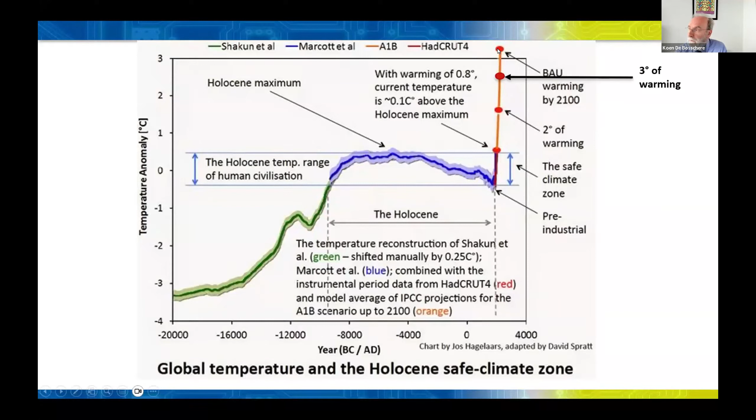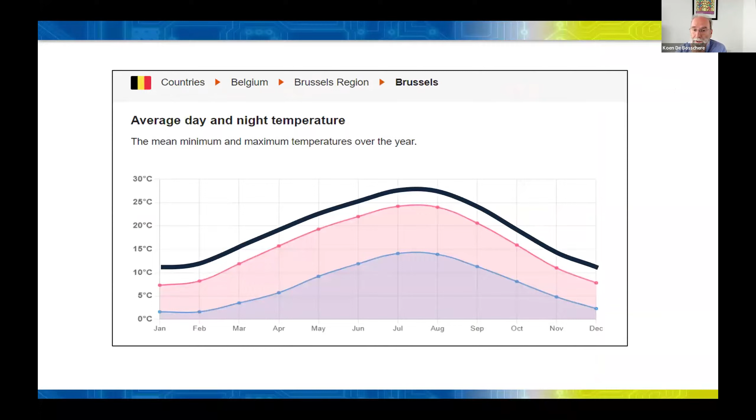If we do nothing, business as usual, we will end up with almost 4 degrees Celsius increase. What does it mean? If you are in Brussels, this is the current temperature. If we add 3 degrees, we end up with the temperature of Barcelona. And if you are in Barcelona and we add 3 degrees, we end up with the temperature of Agadir in Morocco. But this is the desert, which means that in the Mediterranean, maybe we'll get desertification if the temperature goes up by 3 degrees Celsius.

How is this possible? Well, the reason is, of course, that carbon emissions keep increasing. We have been trying to reduce them over the last 20 years, but it leveled out a little bit, though we are still not decreasing. Here you see all the carbon emissions due to the use of fossil fuels. On top of this is methane, on top of this is nitrous oxide, then we have fluorinated gases, and deforestation, which is also causing emissions. So far we have not been able to turn the trend down.

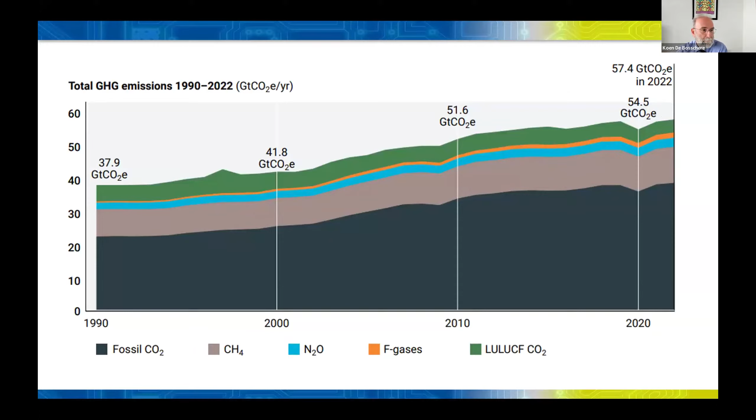So what about ICT? Here I'm using the energy consumption, the electricity consumption, as a proxy for the emissions, which at this moment is correct, I think. Here you see a report by Schneider Electric from 2021 that projected that by 2030 there will be a dramatic increase in power consumption by the ICT sector. A part will be due to computing storage. The blue one is the mobile networks, and the brown one is IoT device use — these are the main factors that will increase the power consumption.

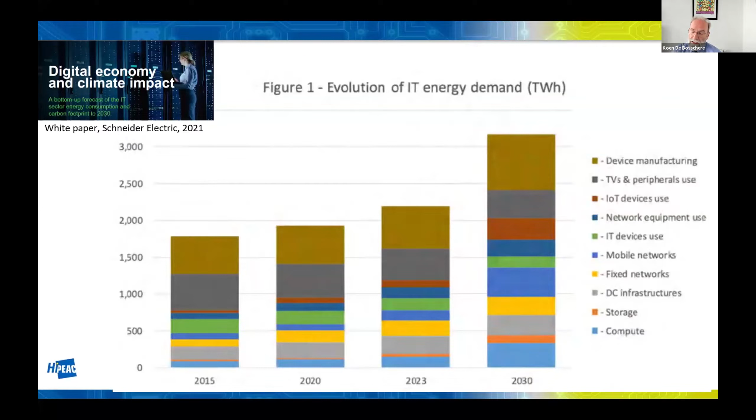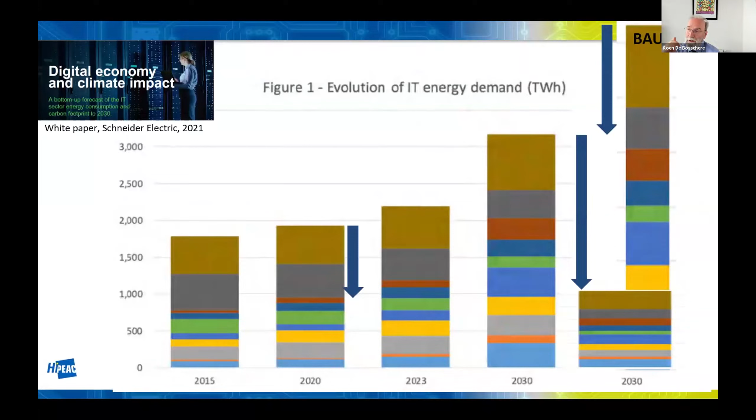If we had done nothing in the last few years to reduce the power consumption, business as usual, it would have been higher. So we did a very good job in trying to reduce the power consumption. But climate scientists expect us to reduce the emissions from 2020 by a factor of 50% by 2030, which means we have to do more. And that's a little bit of a problem, because many of the things we are doing are not reducing the power consumption, but are increasing the power consumption.

For instance, people say, well, maybe the fact that we consume more power isn't necessarily a problem, because there is something called enablement: our technology will allow other sectors to reduce their emissions.

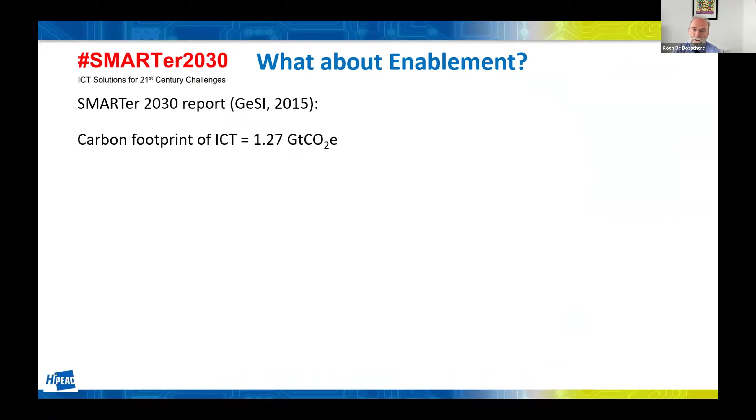And there is even a report on this, called the Smarter2030 report, but that dates from 2015, so that's almost 10 years old. There they did the calculation and say the ICT is emitting 1.27 gigatons CO2 equivalents, but it could save 10 times more in other major industries: agriculture, transportation, heating of houses, and so on. So that's about 20%.

Now, 20% is not enough, because we have to reduce more, like 50%, but 20% is still substantial. Their conclusion was that ICT is actually carbon negative, because for every ton of CO2 we emit, other people will allow to reduce their emissions by tenfold. Of course this is not true, because they claim that reduction already in agriculture, for instance, so we cannot claim it a second time, otherwise you claim it twice.

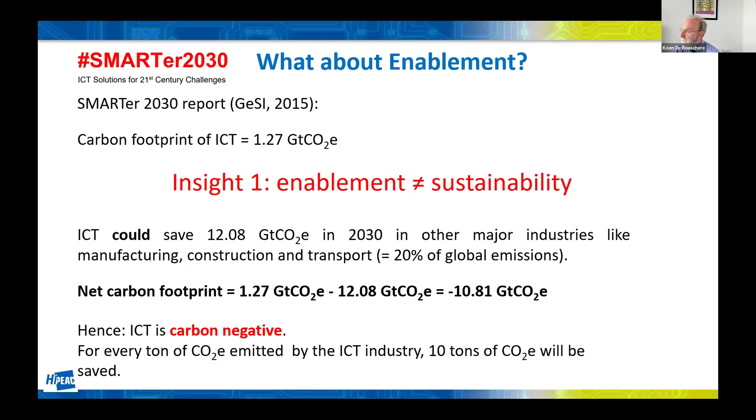So the conclusion here is that enablement, as they call it, is not the same as sustainability. There is an effect, of course, but it's not that you can just say we don't have to save energy, or we do not have to save emissions because somebody else is going to do it for us.

Google, for instance, used 20% more water in 2022 than 2021. So that's not just an increase of 1 or 2%, but an increase by 20%. Microsoft, similarly, 34% in just 1 year. And so the hyperscalers, they think, okay, they want to be sustainable too.

So this is a really difficult problem. But this is not the only issue. Another issue is that the power consumption of the devices that we are using are not the only source of emissions.

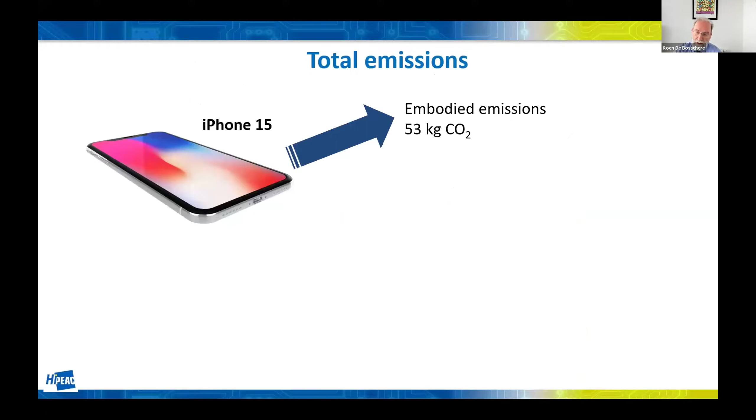Here you see a phone that weighs something like 300 grams, and it has emitted 53 kilograms of CO2 just to produce it. Apple has done a study for the iPhone 15, and this is the embodied emissions, so the emissions caused by the production of the device and the transportation. The operational emissions are more like 10 kilograms of CO2, which means that the operational emissions we are focusing on so far are only a part, maybe a major part, but only a part of the total emissions of the devices, the smartphone, but also the data centers and so on.

So here there's a second insight, that power efficiency is really part of the story, and it's definitely not equal to sustainability. It's not because you use less power or only green, renewable energy, that you are 100% sustainable.

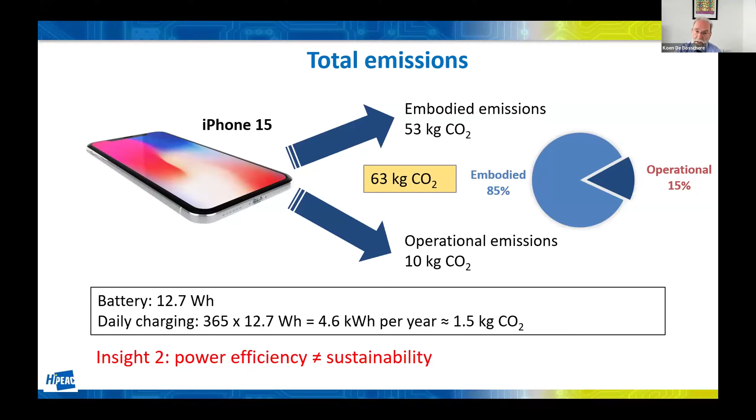So this is an introduction, and I'm very glad that we have 3 experts here in our webinar. The first presentation will be by Patrick, on what it means to be sustainable. Then there will be a second presentation looking more at the material side and what happens in the fabs. And finally there is also a presentation by Lieven Eeckhout on what we can do as computer architects to reduce the impact of the devices we design. So I would like to invite Patrick to share his screen and start his presentation.

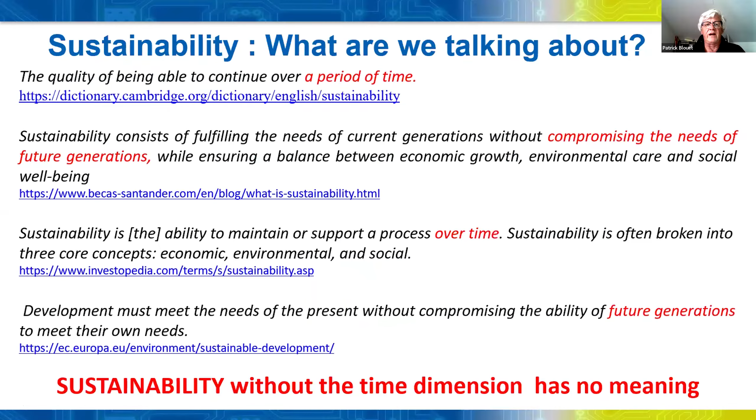The other point I'd like to raise is that sustainability goes far beyond CO2 emissions. We talk a lot about greenhouse gas emissions, but we have to make sure we are not mixing the symptoms and the disease. A simple example: if you have pain in your left arm and chest, you can take paracetamol to reduce the pain, but there's a good chance it won't be enough, because if you make the real diagnosis, there's a chance you're having a heart attack, and the treatment will be completely different. So we have to be very careful about the symptom and the disease.

In our case, we see a lot of symptoms in front of us, like climate change. We saw the big floods everywhere in the world. Today: greenhouse gas emissions, Earth temperature increase, sea level rise, melting of glaciers and ice in the mountains. But these are just symptoms. We are in denial about the issue, saying that with electrical vehicles, carbon capture, energy efficiency, all those things, we should solve the issue. The problem is that being in denial of the issue will not solve it.

I'm not saying we shouldn't do it, but we have to understand what the diagnosis is. And the diagnosis we have is really that we have natural resource overconsumption and massive biodiversity extermination. This is the disease we are suffering from today, and in this case, the treatments are completely different. We have to reduce resource usage, reduce waste, change our economic model and societal model, with drastic sobriety, and of course try to defossilize our world.

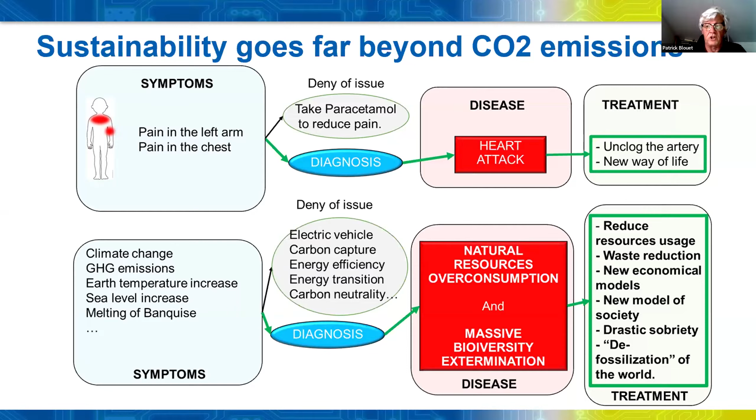When you look at the ICT domain, power consumption reduction is not enough to be sustainable. When we look at the trend, CO2 emissions from ICT have been multiplied by a factor of 9 to 10 in 30 years, more or less. At the same time, the semiconductor industry did tremendous work trying to reduce the power consumption of the elementary transistor. So the electronic industry did a very good job, but it's far from enough to contain the increase in CO2 emissions for the ICT industry.

One of the reasons is that we are always changing the use case, and as soon as we have lower power consumption, we have much more use cases, which in fact generate much more CO2 emissions than the gain we get from the technology.

Just two points to illustrate: in 2020, the CO2 emissions of the ICT industry were more or less equivalent to the worldwide truck fleet. And there was a trend showing that before 2030, the ICT industry's CO2 emissions should be equivalent to the worldwide car fleet. So in this perspective, we see that electric vehicles could be part of the solution, but they're far from being the end solution.

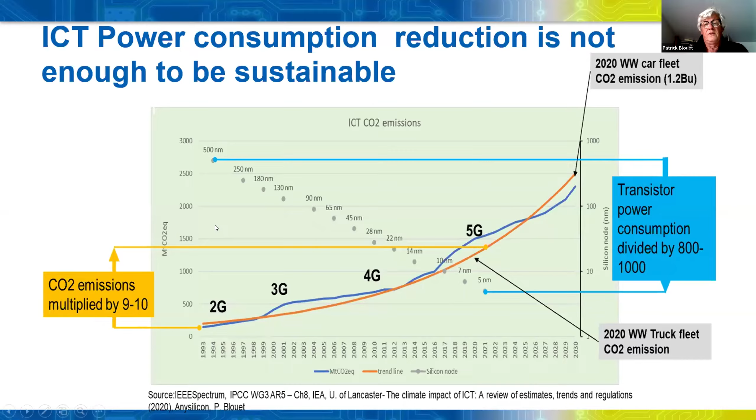So somewhere we are continuously increasing the level of material we are using. And the same for water - the semiconductor and electronic industry is a huge consumer of water, which is a very big issue. We saw in 2021 with a drought in Taiwan the impact it had on the population and on the industry. So it's a major issue, the materials.

The other major issue is the massive extermination of biodiversity. We see that on average we've reduced, for insects and mammals, more or less 70% of the quantity of animals. And this is orchestrated by just the human being. It's the first time in the history of the planet that you have a single species exterminating at such large scale all the others. And this cannot continue, because somewhere it's a risk for our food chain. So it's something we have to take into account.

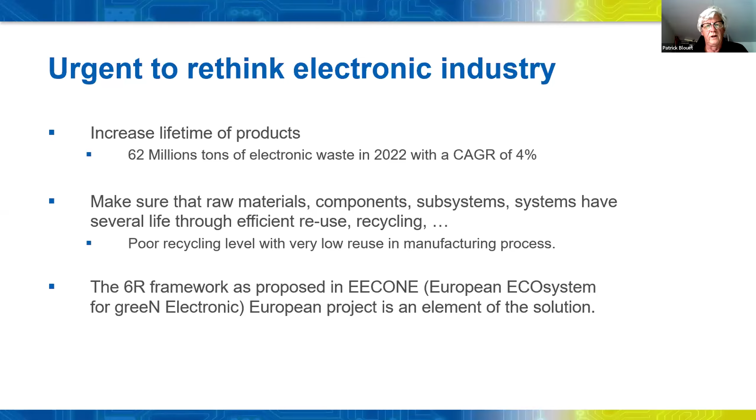This framework has different pillars. One is reliability - what do we do, by construction, to have systems which are much more reliable and capable of lasting longer, to reduce the usage of materials, whatever they are - by changing the manufacturing process, optimizing the different systems, packages, or parts we are using.

Repairing is a big thing - it started in France in 2021, and now it's moving to the European level - making things that are repairable. Just remember the mobile phones we had 10, 15 years ago - it was quite easy to change the battery. Try to change the battery of your mobile phone yourself today - it's just a nightmare. That's why we have to change that.

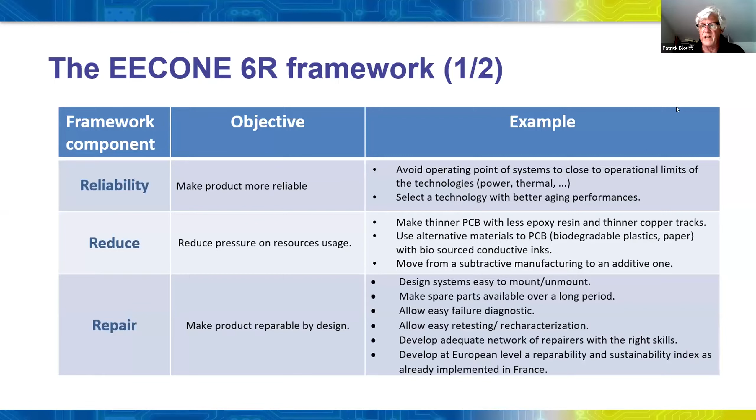We have to come back to something where repairing becomes easy, which has a big impact on the complete value chain, because you need spare parts available, you need people trained to do the repairing, you have to be able to repair, recharacterize, retest, and so on. So it's a very big issue - it's not just about saying 'okay, it has to be repairable.' The complete value chain has to be repairable.

Reuse - that's to reuse some part of the system, being a spare part for others. This is important. Refurbish - maybe to divert a system into another application it wasn't initially defined for, with reduced performance, but it could be enough for another application. And of course, recycling, to recover the materials.

I made a survey inside ST - I cannot disclose the result - about the level of recycled material we are using in our manufacturing process, and to be quite honest, it's quite low, and it's more or less the same everywhere in the industry. There are two reasons for that: sometimes people prefer new materials, or sometimes recycled materials don't have exactly the same physical and chemical properties as the initial ones, and it has an impact on the process.

This means we have to think about industrial processes which are much more resilient to materials with maybe not the best characteristics, but degraded characteristics.

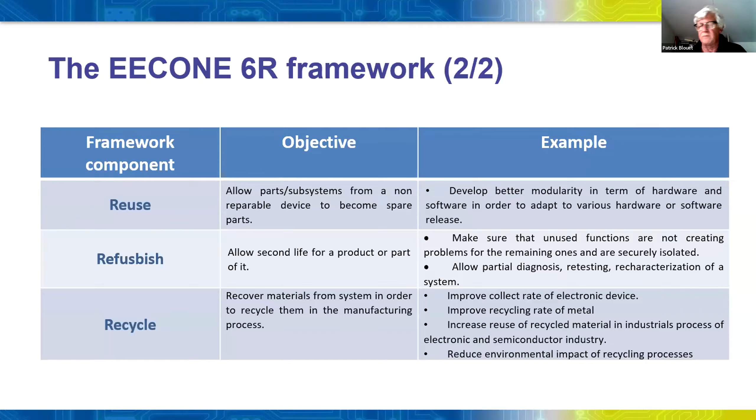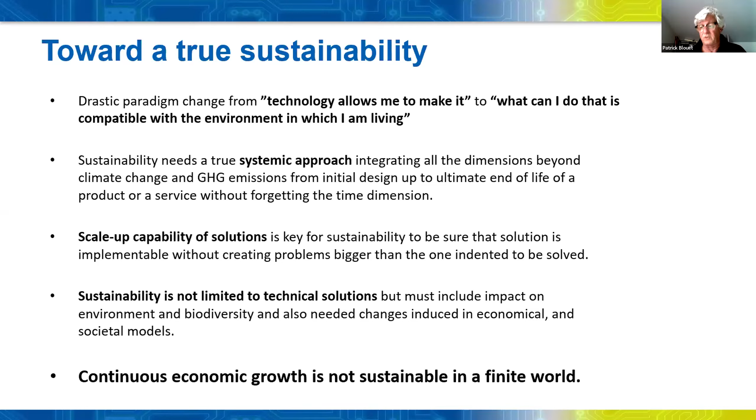Thank you very much for your time.

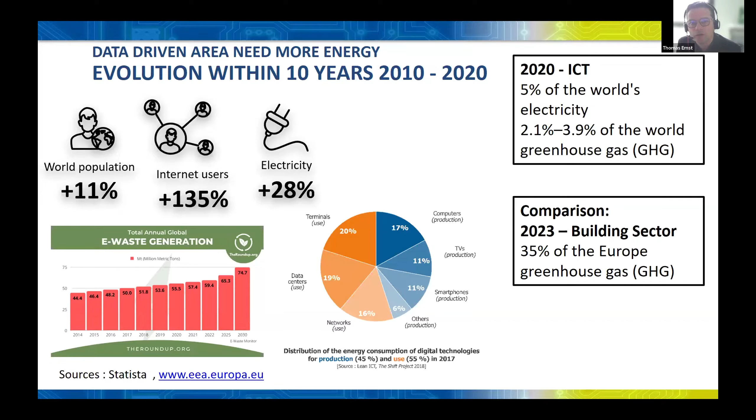Another problem is e-waste generation. We produce more and more waste due to ICT. So also we can change the way we consume and design our products to reduce the wastage.

An example about energy consumption: people usually speak about Jevons paradox and rebound effect, but this completely depends on the application and the way the ICT is designed at the beginning. For instance, if you compare the electrical consumption of a classical data center and one dedicated to cryptocurrency, you can see that energy efficient solutions used in data centers maintain the global energy consumption worldwide, whereas cryptocurrency is out of control.

So it's very important just at the beginning to introduce sustainable concepts, both at the hardware level and also at the software level, for cryptocurrency for example. Now if we consider the material aspects, we can see that more and more materials have been introduced since the 80s in ICT globally, and now we are up to 60 different materials.

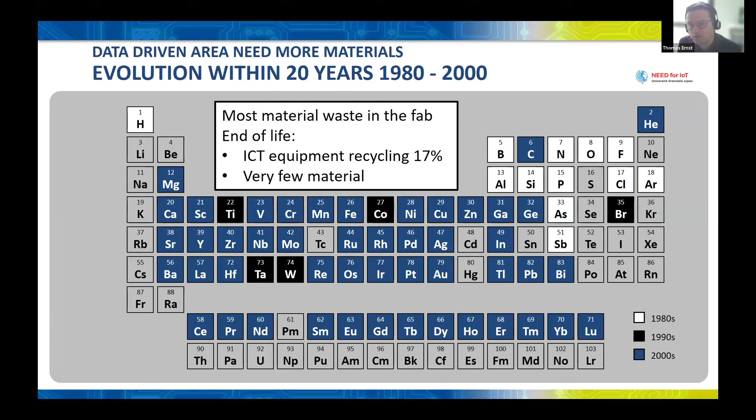As Patrick said, very few materials are recycled within the fab or at the end of life. The ICT equipment recycling rate is 17%, but this does not include most of the materials. Very few materials like gold are recycled at the end. Also, the production of materials themselves is concentrated and controlled by a few countries, which makes big problems for the supply chain.

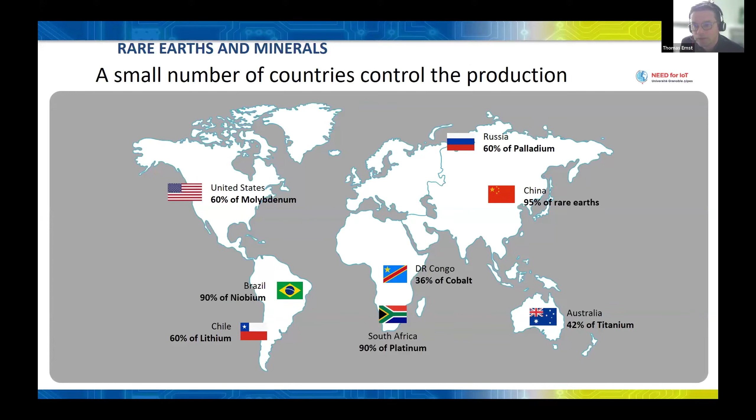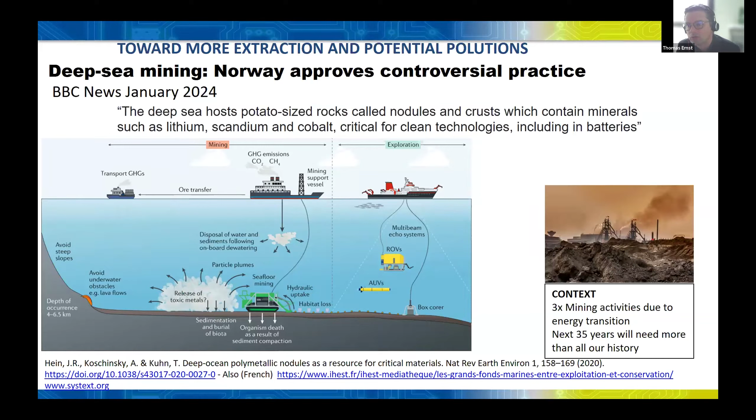And the conditions of production of the materials themselves can be questionable. If you see the recent news about Norway approving deep sea mining - as you probably know, mining is not a clean industry, and it introduces problems like water pollution. But if you introduce mining in the ocean, there's a lot of possible pollution that can also be out of control. For instance, energy transition will introduce an increase of a factor of 3 in mining activity in the next years.

So we have to reduce, in the new technologies, the use of materials, rare metals and materials. And to do that, we should go toward a more efficient production of integrated circuits.

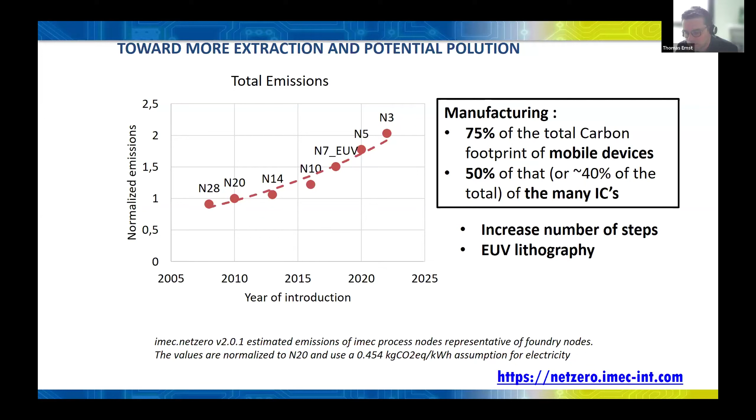This is due to an increased number of steps, and also EUV and advanced lithography, which consumes a lot of energy intrinsically.

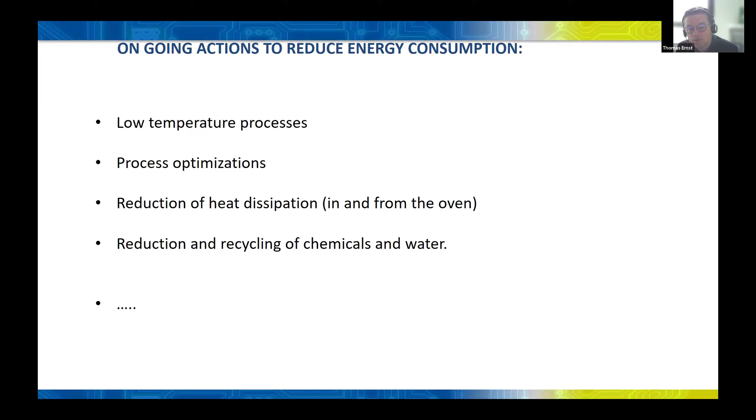So there are many ongoing actions now to reduce this energy consumption. Here are some examples: switch to lower temperature processes, process optimization, reduce heat dissipation for instance from the oven, and also we can reduce or recycle chemicals, the use of chemicals and water.

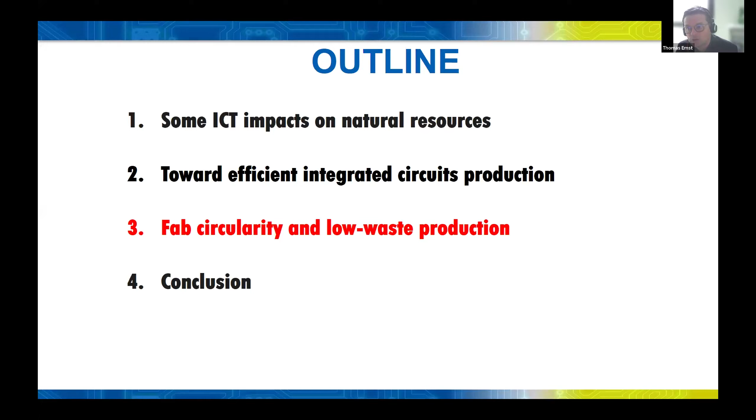So this makes a transition to the concept of fab circularity and low waste production in the fab. If I take the example of chemical vapor deposition, which is a very classical way to deposit layers in a microelectronic fab, the materials are in a gas and enter a reaction chamber, then you have a chemical reaction on the surface, and then the gas goes out.

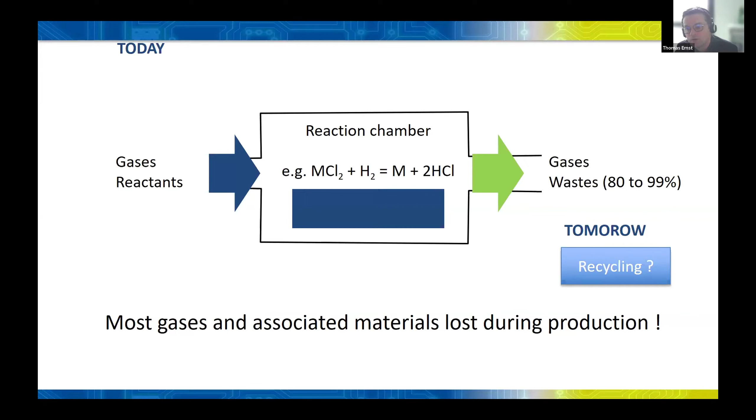We can say that about 90%, or between 80 and 99%, of the gas that enters as reactants goes out as waste. That means that most of the material goes out of the fab like waste, and this can be recycled. So if we want to go to a concept of circularity and circular fab, we have to recycle the gases out of these kinds of processes.

We also have to evaluate all the impact of the manufacturing of IC, from the raw material to the wastes, during the whole life cycle analysis. This is done using improved methods, for instance you can find norms like ISO, and these methods are multi-parametric. I will give you an example after on that.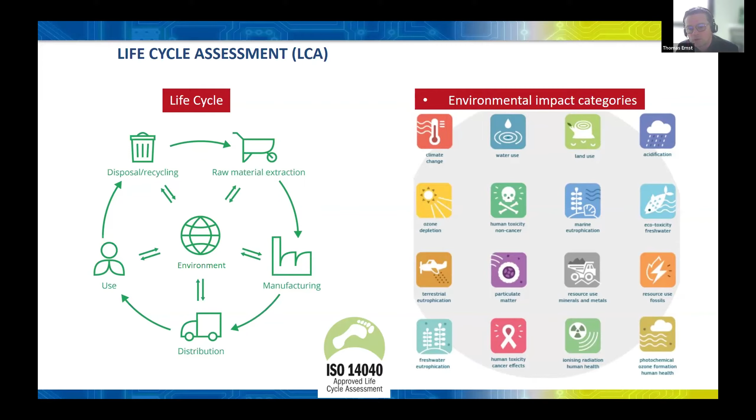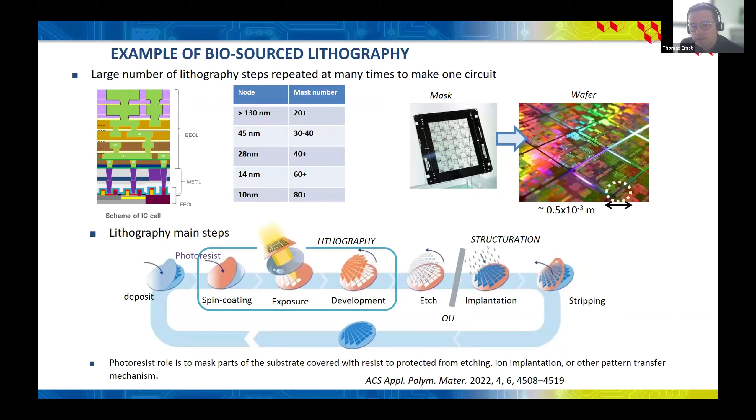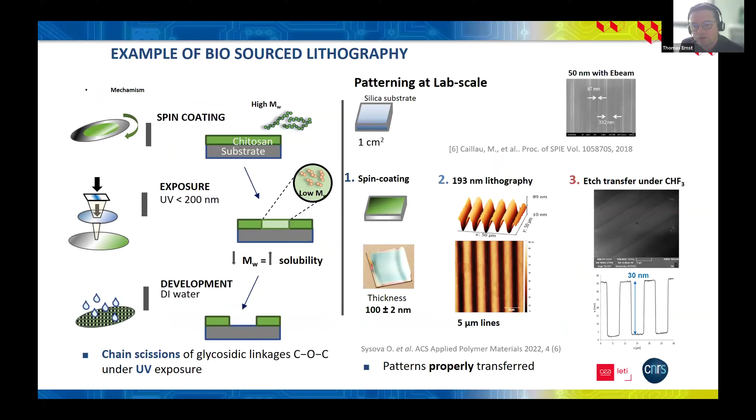Photoresist plays a central role in our processes, and they are also a source of pollution. In this research, our colleague demonstrated biosource material for lithography based on chitosan, which is produced from natural resources, and they demonstrated the feasibility of such material. And with this, you can replace

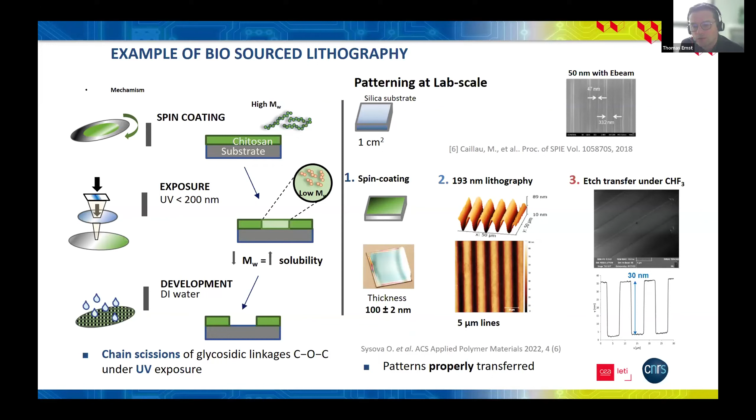the solvent, which pollutes a lot, with water, for instance. With life cycle analysis, they could evaluate the impact of such processes, and they show that there's a strong reduction, about half reduction, on most of the parameters linked to climate change, toxicity, water, or use of minerals.

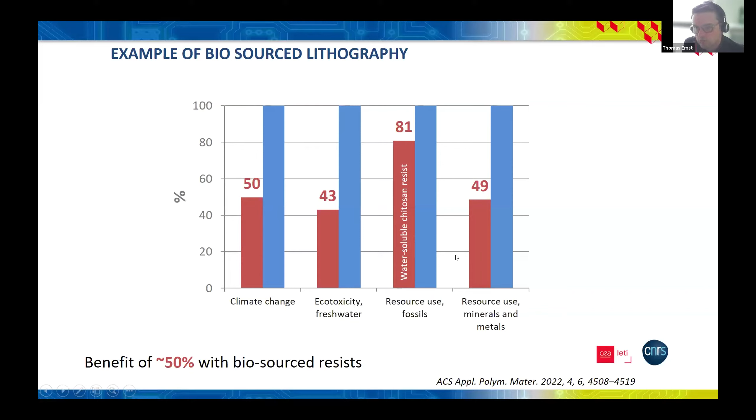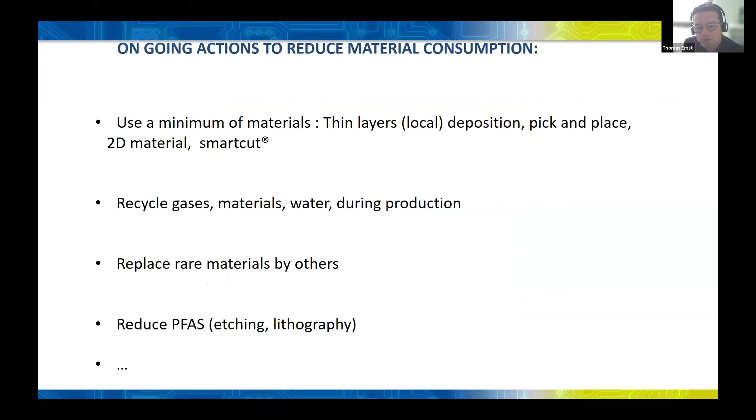There are other actions, like using thin layer deposition, pick and place material, use smart cut thin layers to reduce the use of material, recycling, replace, reducing PFAS also, which are a problem for etching or lithography, and some opportunity to make the ICT supply chain more transparent.

Introduce life cycle assessment systematically in our industry, use declaration of material on the products, and implement a clear and ambitious research plan to explore sustainable semiconductor manufacturing.

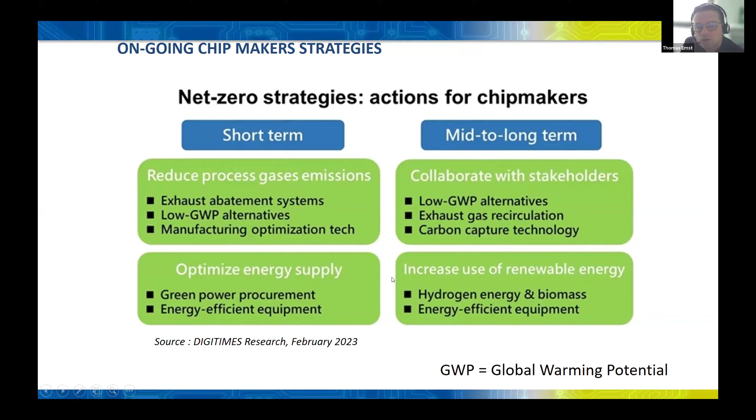This is an example in the industry, with a reference showing action already ongoing on abatement systems, which are the systems used to, for instance, recycle some gases, use low global warming potential alternatives on the processes, and many other actions used today in industry to reduce their impact.

More globally, the action should be at different levels. We already talked about production, like reducing waste, but also the water used, and recycling water internally in the fab. Reduce the use of critical material, and recycle all the waste.

Also at the IC design level, there will be a presentation on that, by using new computing paradigms that use less material, and also developing ultra-low power expertise. At the product level, the lifetime should be increased, and that changes also the business model. When you want to increase the lifetime at the product level, you have also to rethink your devices themselves, transistor, etc.

LCA should be introduced at the design level also. Applications should also introduce data flow life cycles. That means store less data, because data also means materials to store, and have a sustainable global impact. So I would say globally, we have to integrate circular economy principles and eco-design at all levels. Thank you for your attention.

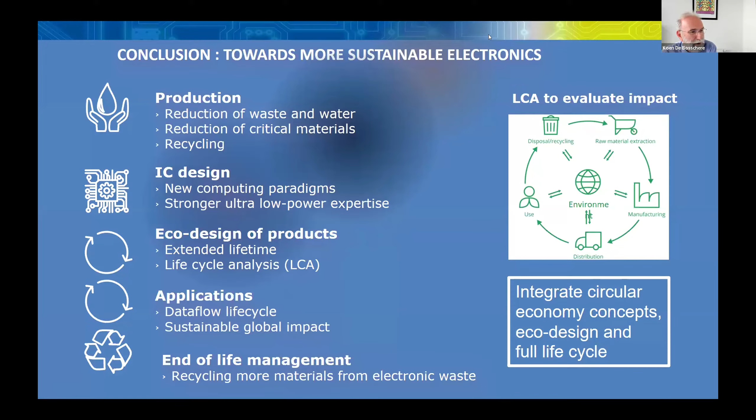So I work in computer architecture, and the key question that I wanted to answer was: how can we design more sustainable computer systems?

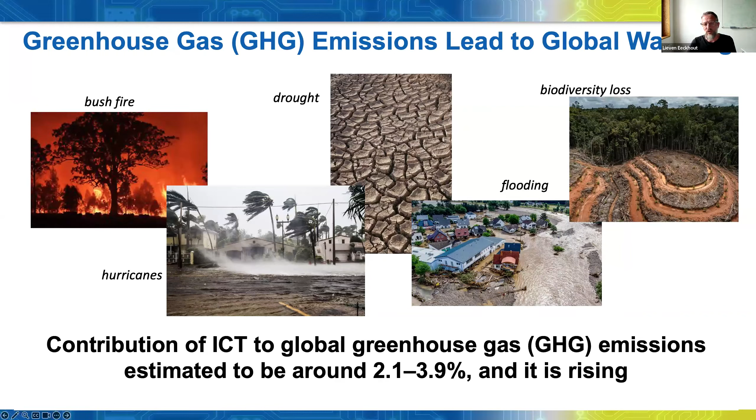As my previous colleagues mentioned, greenhouse gas emissions lead to global warming. Sustainability is obviously even more encompassing than global warming. ICT is responsible for 2 to 4% of global greenhouse gas emissions, and this is actually on par with the aviation industry, in case you were doubting the importance of this impact. Now, if you look at the carbon footprint of a computing device, it's really two big parts.

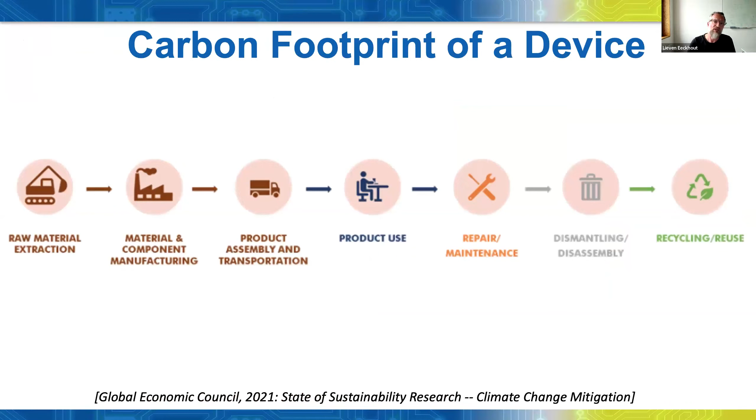There is the embodied footprint for manufacturing, and eventually recycling or dismantling, which we call respectively the upstream embodied footprint and the downstream embodied footprint. And then we also have operational footprint due to product use during the lifetime of the device.

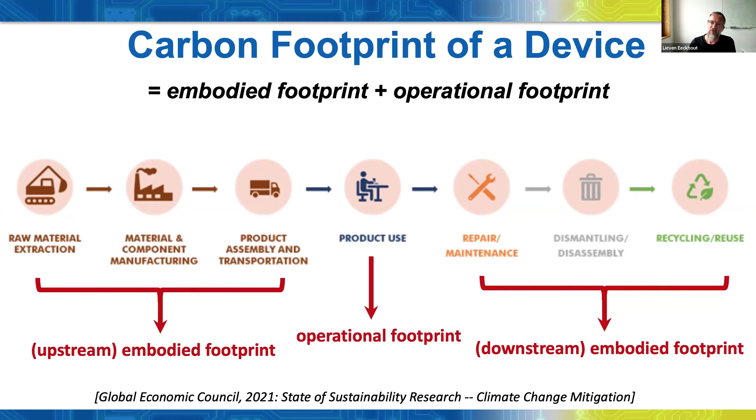Now, trying to think about how to design more sustainable computer systems, there is a big challenge here because there is inherent data uncertainty. There is massive data uncertainty, actually, regarding the raw material supply chain. There's secrecy in the industry, like yield numbers, for example, will not be publicly released. There's unknowns about the expected lifetime of devices. The energy mix at production or at use, intensity of use, is really hard to predict for future products, and there's even a rebound effect.

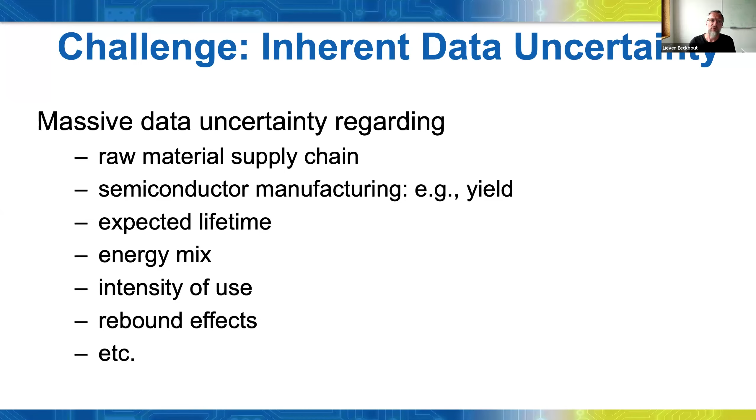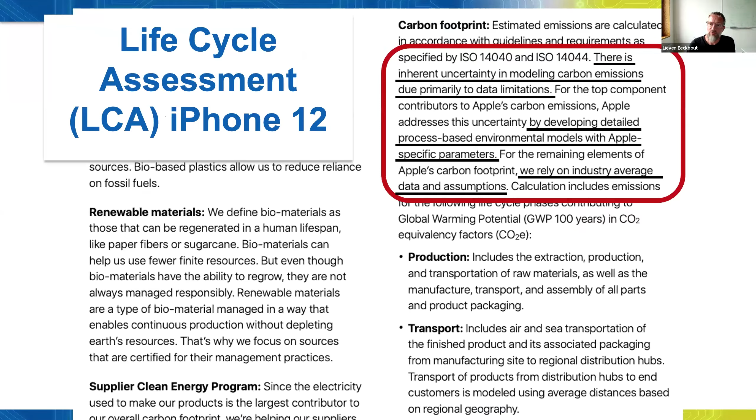Let me try to explain this a little bit more. So an LCA report from Apple on the iPhone 12 actually admits that there is massive data uncertainty. Apple develops some of their own models, but for the parts that they cannot have reliable numbers on, they are actually using assumptions and industry averages.

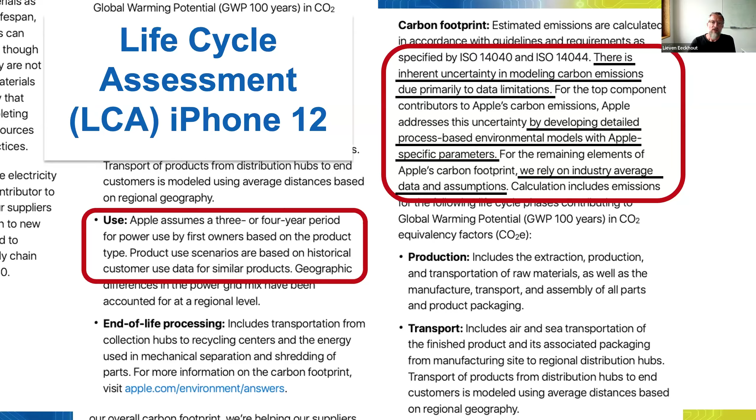And when it comes to product use, they only look at the 3 or 4 years of the first users using the device. And then they are using historical data to estimate what is going to be the usage intensity of the devices. Now, I'm sure you've heard about the rebound effect, or Jevons paradox.

As Patrick Blouet already mentioned, the use case is not constant. So if you make an individual device more power or energy efficient, that may actually lead to an increase in the use of that device. This paradox goes back to Jevons, who noticed that when James Watt came up with a more efficient coal-fired steam engine, the total consumption of coal actually increased.

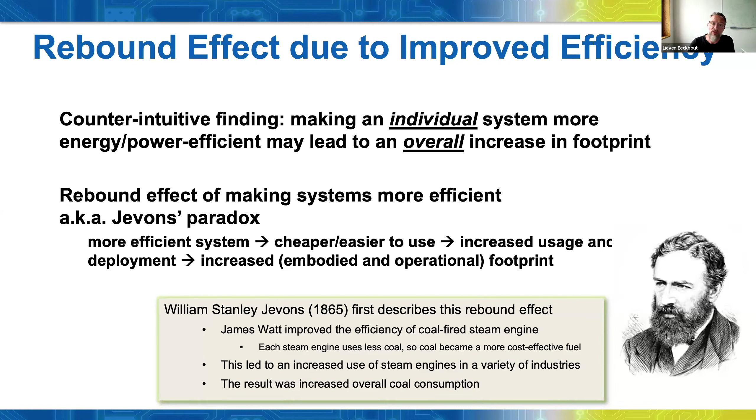And we also see this in computer systems. For example, in the data center, if you come up with a more power-efficient server, the immediate reaction from data center exploiters will be to install more servers within the power budget of the data center. So this is a real effect in computing.

So given the massive amount of uncertainty, how should we deal with this? How can we still design more sustainable computer systems, even if we have this massive inherent data uncertainty? My take on it has been to actually embrace it.

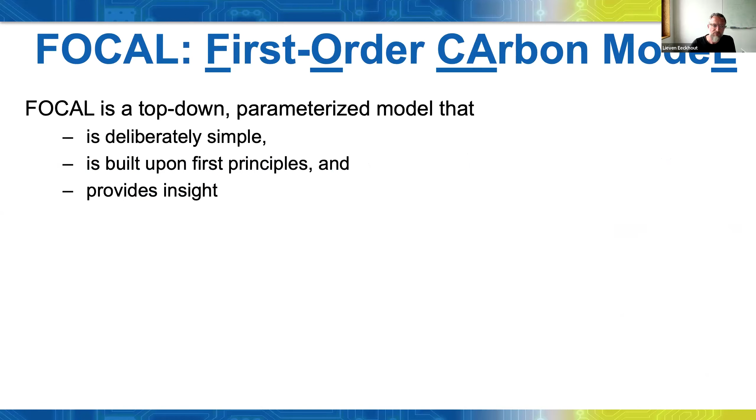This is why I've been working on a very simple model, which I call FOCAL, a first-order carbon model. It's a top-down parameterized model that is deliberately simple, built on first principles, and the goal is to provide insight. The key idea is to use proxies so that computer architects and system engineers can reason about those proxies for the embodied and the operational footprint.

Then we can parameterize the relative importance of the embodied versus the operational footprint, while considering different use case scenarios, including rebound effects. Although the model is very simple, it's actually really powerful because if you change some of the parameters and see what is the impact on the overall conclusions, and if the conclusions are similar across a range of scenarios, you can be quite confident about those conclusions despite so much data uncertainty. If the conclusions depend on the specific scenarios, then you have to be more careful when reaching such conclusions.

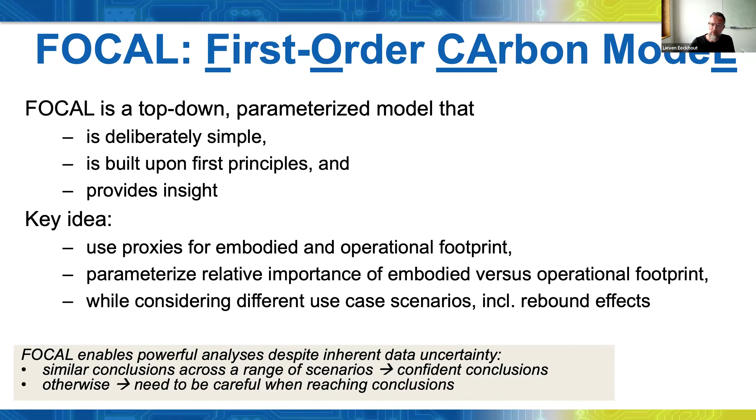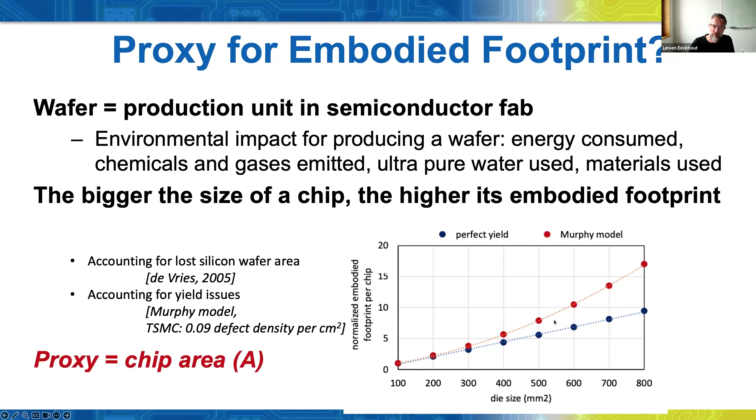And what about the operational footprint? Here I'm making two assumptions, or considering two scenarios. The first scenario is where we consider that the amount of work that needs to be done over a lifetime of a computing device is constant. So if you compare two designs, X and Y, it's really the energy consumption that is a proxy for the total operational footprint of the device, because the amount of work is constant. So here we can use energy consumption as a proxy.

Now, as I mentioned before, Jevons paradox - if you have a computer system that is more energy efficient, it incentivizes doing more work. So here, in a fixed time scenario, we're assuming that we're using the device for an equal amount of time. If you have a more efficient design, that means we will do extra work. The total energy consumption of systems X and Y becomes proportional to power consumption. So under this scenario, we're going to use power consumption as a proxy for the operational footprint.

Okay, so now we have a proxy for the embodied footprint, and a proxy for operational footprint. So how should we weigh relatively the embodied versus the operational footprint? That really depends on a number of factors. There was a very insightful paper from Gupta et al.

At HPCA 2021, showing that battery-operated devices like smartphones, tablets, smartwatches, and so forth are much more dominated by the embodied footprint compared to the operational footprint, whereas always-on devices like desktop computers and gaming consoles are much more dominated by the operational footprint. So the device type really has a big impact.

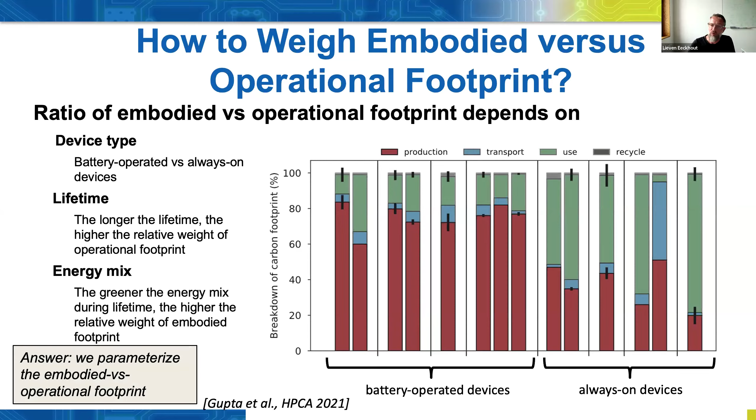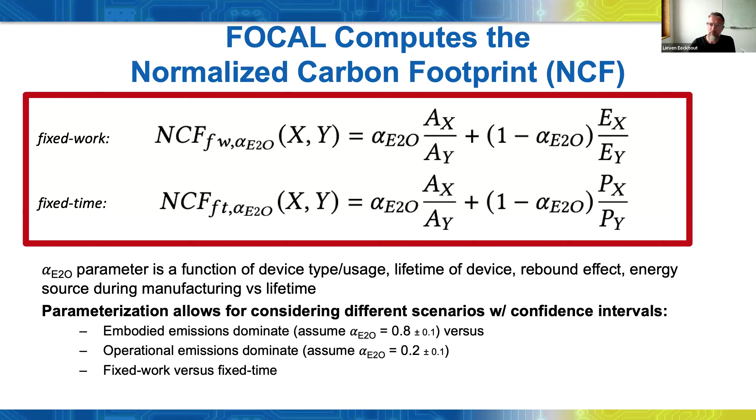This brings me to a very simple model that computes what I call the normalized carbon footprint under two scenarios: a fixed work and a fixed time scenario. It consists of two parts: a weighted embodied footprint proxy, and a weighted operational footprint proxy. By playing around with these alpha values, we can consider different scenarios where the embodied footprint is more prominent compared to the operational footprint, exploring the effect of design choices on the total carbon footprint of a computing device.

I've been using this simple model to revisit a number of archetypal processor design choices, classifying them into three categories. A design choice is strongly sustainable if it reduces the carbon footprint under both the fixed work and fixed time scenario, so there's no risk of a rebound effect. A couple of microarchitecture and design choices fall under this category. Weakly sustainable means it reduces the carbon footprint only under a fixed work scenario, so there's significant risk of a rebound effect under a fixed time scenario. Some design choices are less sustainable because they increase the carbon footprint under both scenarios, and there are a couple of examples there too.

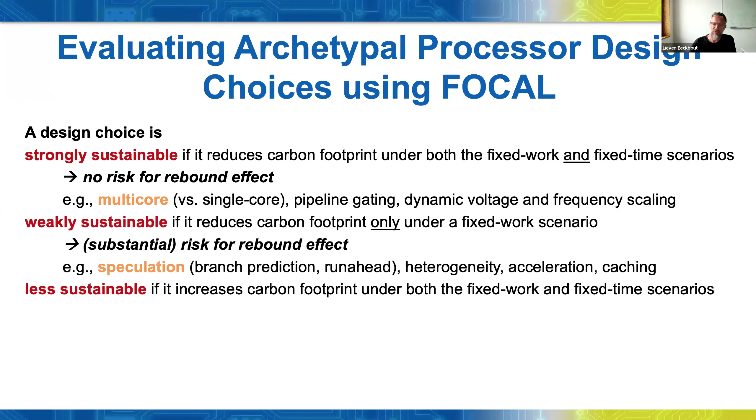The examples highlighted in orange here are the ones I'm going to explain now.

Parallelizing software is weakly sustainable, the second conclusion here. If we increase our degree of parallelism from 50% to 95%, we have a reduction in carbon footprint under a fixed work scenario, but under a fixed time scenario, the carbon footprint will actually increase.